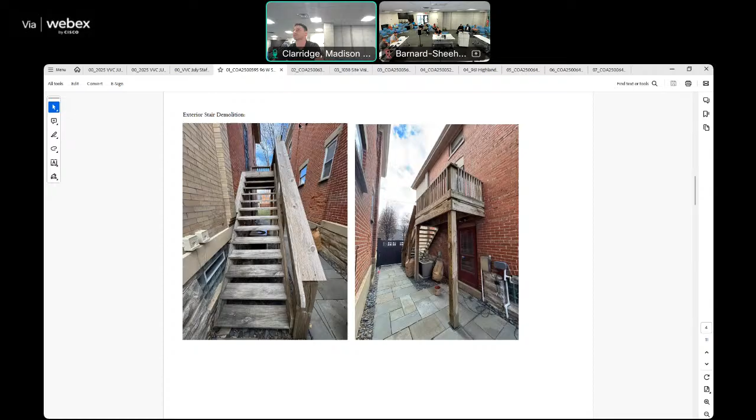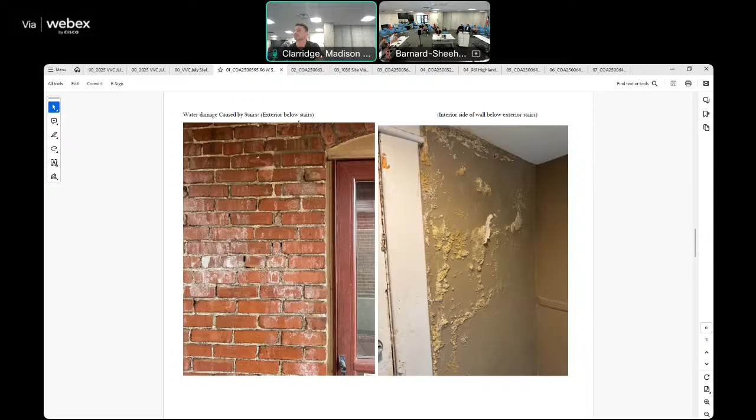Anything you want to add about the proposed work? Just that the stairs are non-contributing to the home. The home was originally a single family, converted to a multifamily, and I believe in the early 2010s converted back to a single family. So this is one of the remaining pieces that would help complete the single family transition. Also, the stairs channel water towards the home, causing damage to the interior and exterior, which is necessitating the removal.

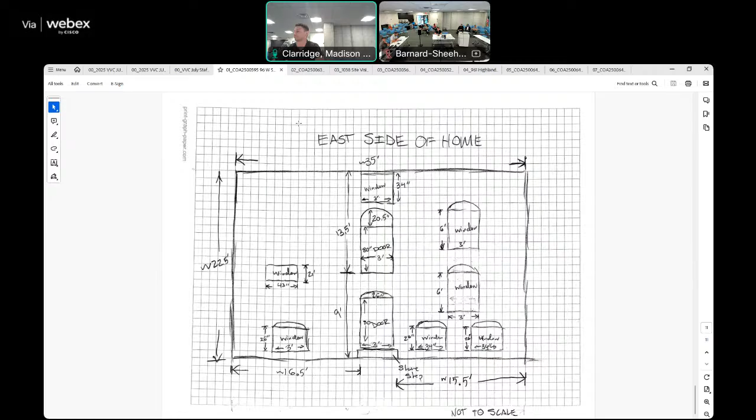Thoughts? Anything? That clarification, I think, helped on the door from a safety perspective.

Is there a motion? Motion for Certificate of Appropriateness 25-00-595, 96 West Starr, as for approval as submitted. Second. All those in favor say aye. Aye. Any opposed? Motion carries.

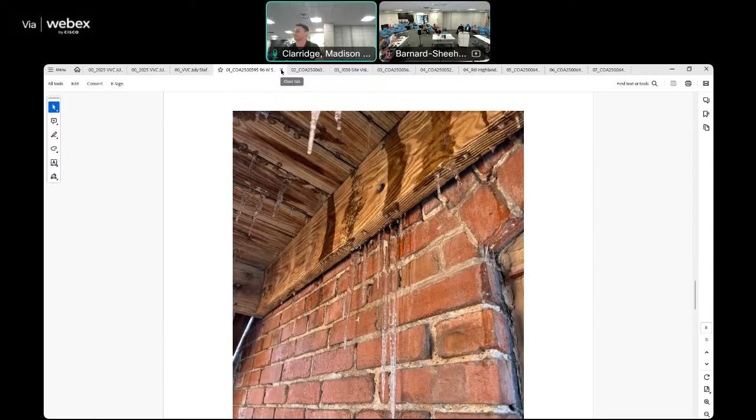All right, we're going to move on to application number two. This application is for 362 Wilbur Avenue. Go ahead and I'll finish reading the staff report. I'm hard of hearing.

This is to replace retaining bricks around flower beds and replace the existing retaining wall. Commissioners at the business meeting requested a site plan and construction details of the wall. They wanted to know if there was drainage behind the stone, and the applicant clarified that there's just dirt behind the wall.

More information on the material was requested, such as the cover product sheet or information from the store it was purchased at. The commissioners were curious if additional landscaping work would occur, such as planting of flowers, bushes, or trees. HPO staff will be inquiring with the Department of Public Service if the sign currently located there can be relocated. I have inquired, I have not heard anything. I will be following up with somebody different as well.

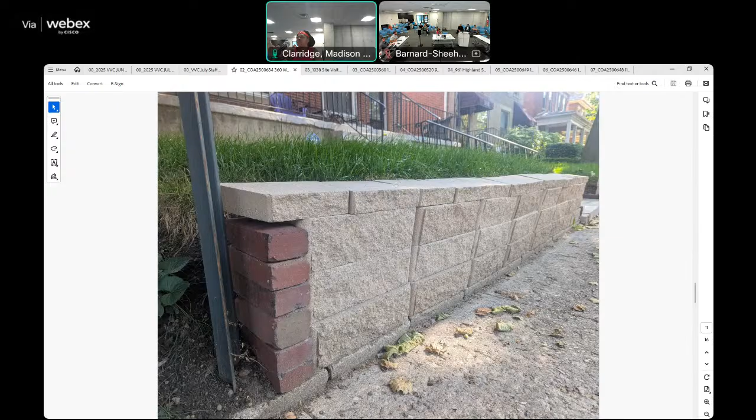The question was whether there might be a drain behind the wall. It's not, it's on the side and it comes down, out into the street. In front of my house, I make sure all the leaves and stuff run to the corner where the drain is. One on the right side is connected to PVC. The other one comes down but it's right on the outside and just runs down. And those little rocks, the neighbor and I made a little trough and put some rocks so it can not overflow and come straight down into the street. So that's what those rocks are for, just to guide the water.

Turn it over to commission comments about that. I didn't hear what else. At first it was about the wall, and she was concerned about the sign. For me, it's okay that it was there because it's for my use. As I stated last time, I believe the reason they put it there wasn't for the whole parking place, just for one parking place. So that's what I believe they did.

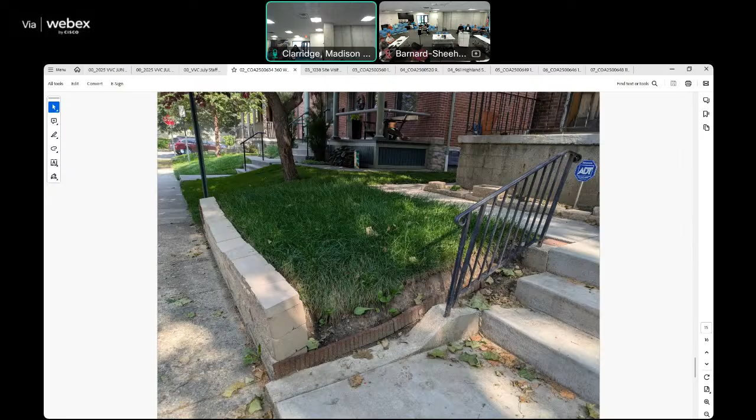Yes sir. Okay, so we have heights, we have material, we have install. Is there anything else, team, that we're missing? I think we talked about appropriateness of material. I think the type of block we have here with that finish is appropriate. Once we get the staggering of it, I think it's appropriate.

And I think obviously you said it was a gift, right? You're my son. For sure, and I think what we're trying to do is maintain the integrity of the gift. So we just don't want to see it walk away, all of a sudden everything's gonna fall, but we're trying to help you prevent that. I appreciate it. Okay, is there anything else, team, that we're missing?

So I think our next step, what we would do is we would vote to continue the application, if you're willing to make those modifications and work with HPO staff to provide a detail, work on the application, go back and look at some of the things we suggested. And then you would come back and we would vote on that new material to be able to clear the application.

Yes ma'am, and then you would be able to move forward with whatever install product data, whatever you're willing to do as part of your application, then we would vote to move that forward, and we'll go ahead and do it at that time.

Could I maybe play devil's advocate for a second? Yes sir. Would it be, you know, to reduce the number of meetings - I agree, the applicant might not want to come back necessarily - should we vote on an approval with those conditions? Changing the bonds, changing the...

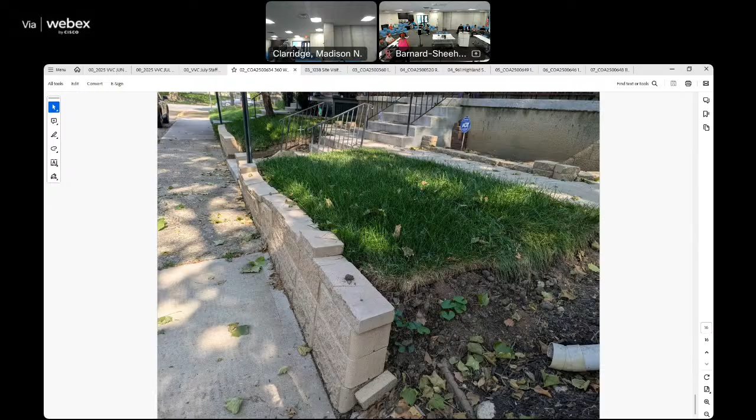And if they're willing to just draw anything out to show what they're doing, just like I think on the back of your paper there, Sean. Okay, just something very, very simple. Hold something that's like, hey, this is what we're doing, and there's a little photograph, and they can draw on the photograph. However it's easiest for them to present it to us, but we just have to have that documentation in place. Does that help? Yes, it does.

And I understand what you're saying, because I was just gonna do it, and then tell you what you're saying, you want it before, so the clarification, great question, great question, yes. All right, so go ahead and sit down, and we'll go ahead and vote accordingly, and then that way we can chat. Do I sit here? Yeah, no, go ahead, back to where you were seated, right there.

Okay, so a motion team. Yeah, I think maybe in the amendment, in the motion, we're just gonna spell out what that is that we talked about, just so it's clear. Very slowly, yes, because I'll get it right. Okay, no worries. So I can take a stab at it. Yeah, sure, I appreciate it. Thank you.

So I would make a motion on COA 2500-634 for 360 to 362 Wilbur Avenue to approve the application with the following conditions: that one course of block be removed from the wall to lower its height, that the block be installed in a running bond pattern as opposed to a stack bond as submitted, and to provide further design for drainage on the retaining wall, and to provide returns at the stair and at the end of the wall as feasible, given site constraints.

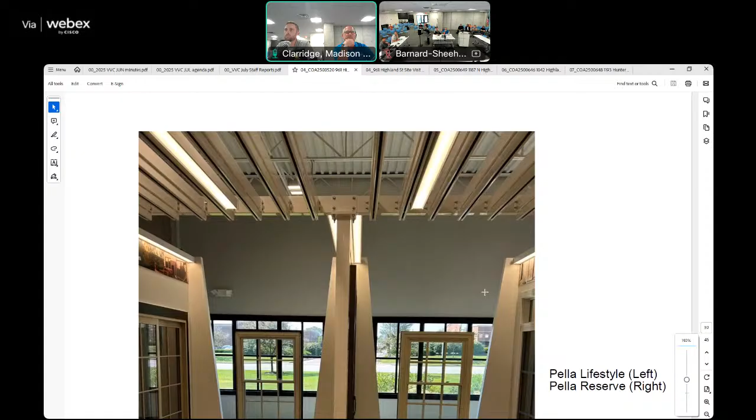It is, it's right there. So those are the two completely side by side with each other, Lifestyle and Reserve right next to one another. Obviously, the one on the right has applied brick mold on it, whereas the one on the left has zero exterior trim, it has applied brick mold but a smaller profile.

These show grids. We're not proposing grids, so that's what makes those look a little different. I think what's challenging is there was a lot of work that staff did to make the list, and there's some cut sheets that took a lot of time to try to help us.

Every application being able to make that comparison is really challenging for us. I think even with the information that's been provided, that's what's challenging for us too, right? So the thing that we continue to uphold is the most current, approved list.

So I think today we did get clarification that the architectural series needed to be the reserve series. I'd advise, even outside of this application, your team being able to sync up with the HPO staff to get that clarified, because that's going to help you guys in the future too.

Is there somebody we can contact to do that with? Okay, so I think that's just from an application perspective. I don't know, as far as the information that's available today, to be able to make a call that the merits of that proposed lifestyle meets all the things that went into the approval process of identifying what windows and what manufacturers should be on that approved list.

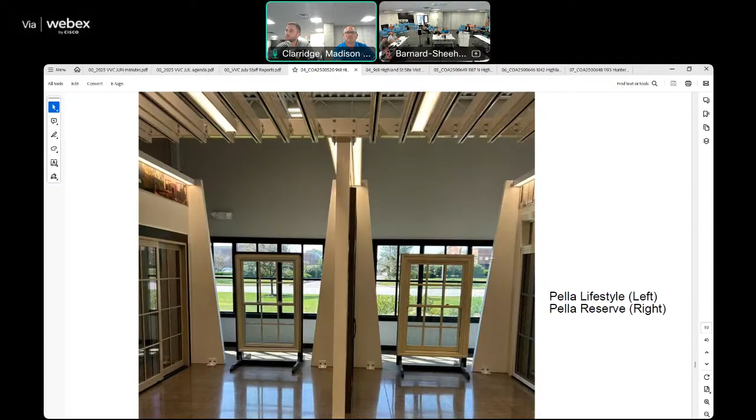Yeah, they're definitely different. And I understand, I think it's really tough for us, because the thing we all understand is what does that look like. Trying to keep the sash as thin as possible, trying to keep daylight, the unit as large as possible. All of those things lead into the aesthetic of it, but for us, I don't know if we could identify that today, to be able to say that is an acceptable alternate from that perspective.

So I think the only thing that we can do is really kind of swing back to the approved list. Purchase costs and things like that are kind of outside of our purview. So the only thing we can really try to point to is the approved windows list, with the information that's being provided today.

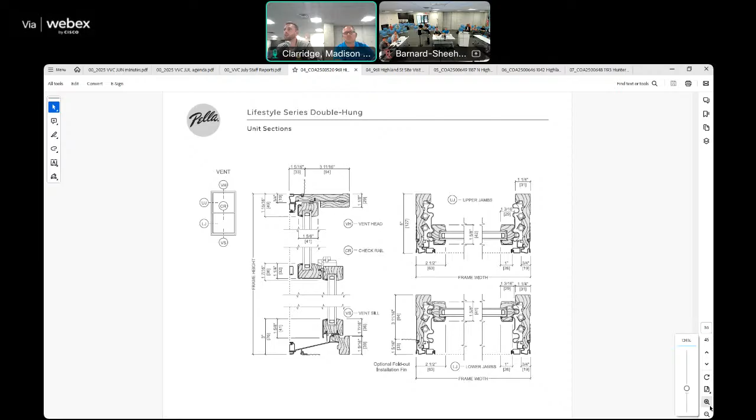If I do have one follow-up question to that - so when we had met the last time, that's actually exactly what I was going to point at. When we had met the last time, I was asked to provide additional information about the window, a cut section, and also the corner sample I brought here. So what additional information would you need from me?

Yeah, I might want to be just looking at the frames. Seems to be a lot of fluting. Cladding that's outboard of the window, glazing. You can see a rounded profile here, and it's kind of the same as the sample. It might be better to show that, since it includes that specific style.

So this is the lifestyle unit right here, and that cut is the cut section of the same unit - that's the outside, this is the inside. I'm noticing that the feature about this window is a very striated jamb, and I'm not certain whether the reserve window would have that same feature.

Are you talking about the frame, the exterior frame, this portion here? Correct. The frames are identical between the reserve and the lifestyle - the only difference is the jamb part right here. Yeah, the interior jamb here is different on the reserve product. To me, that is a visual quality that might make lifestyle windows something I would hesitate about saying is appropriate, if it's going to vary significantly from the window that's on the approved list.

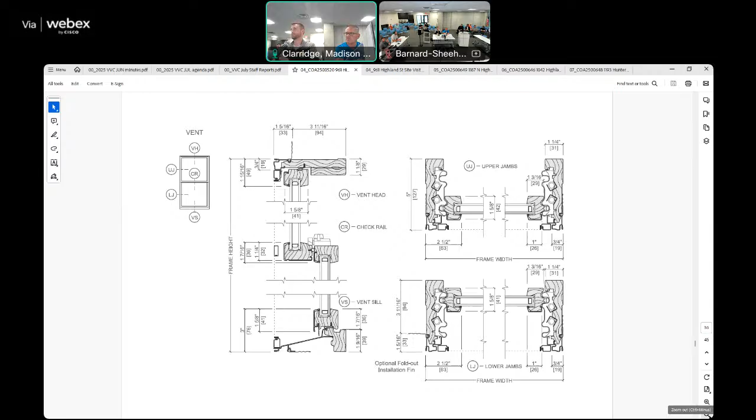It's an interesting anecdote. It's something that we- perspective. Yeah, it's interesting.

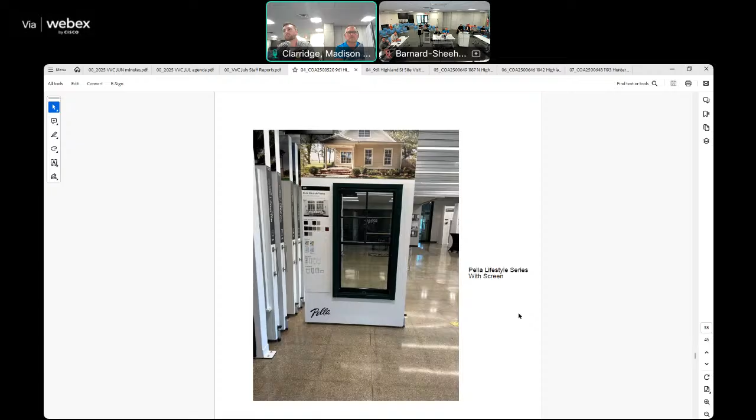Or I guess we have approved it in some cases, or put it in the test cases, but we're willing to follow you guys down those steps, but it is gonna take going into detail - more than we can do today - in terms of the mitering of the corners and how the cladding is done, all of the stuff that none of us here are individually equipped to find out on, and in relation to the other committees, because it's not just our list in terms of the commissions. So, I understand there's a price point difference, but time is money as well. We're happy to go down either road with you guys, but just want you to know that's kind of where those two paths take us.

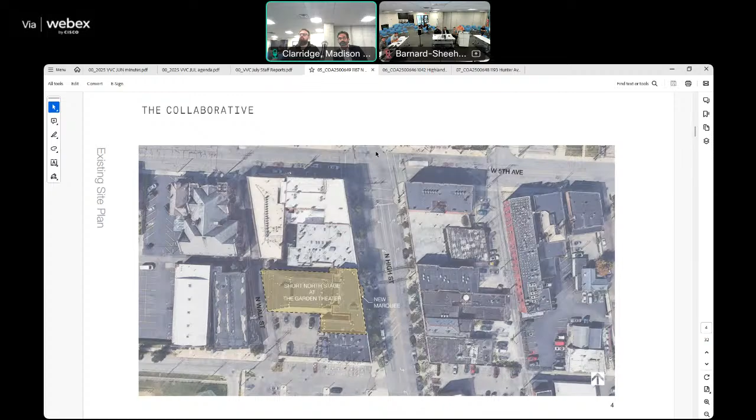Can you guys state your name? Tom Mahoney. Mark Suplak. Logan Dutz. Do you swear to tell the truth, the whole truth, and nothing but the truth? Yes. Yes.

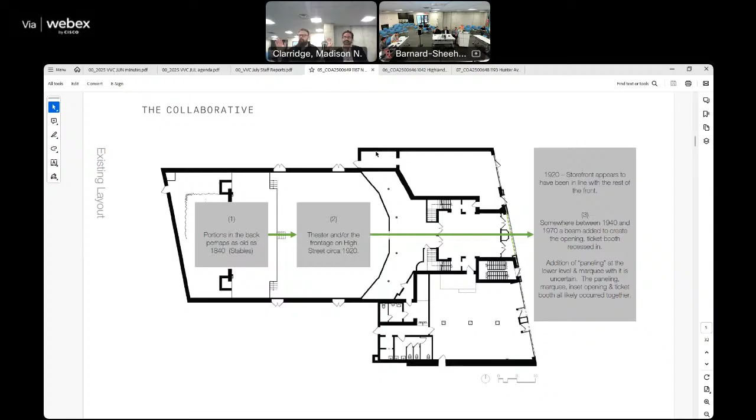We can belabor this or go through it quickly. This project's been around for a while. Sean, it sounded like you've been on the commission for a while, maybe you've seen it. The rest of you perhaps not. I'll say the same is true on our side, we're new to the mix as well. So there's history on the project, history on the building, but we just want to level set on that. We're new to the mix, and we're honoring a lot of the good work that came before us, be it the alignment relative to the commission and the designers who came before us.

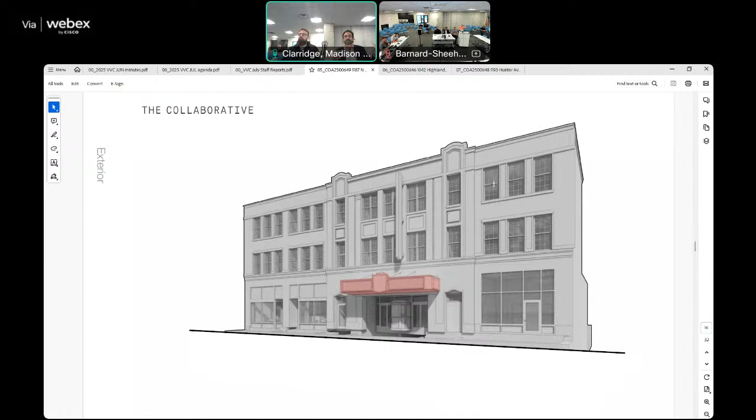Ultimately, what you have in your packet, the DaNite package in particular, is the previously approved package that occurred, I think, prior to the pandemic. Obviously the pandemic stymied just about everything, inclusive of the business. It sat dormant, all good intentions by everybody involved, while the Short North Stage, which is a nonprofit, got their arms wrapped around certain things, capital campaign in particular. So some of that is gaining a little traction now.

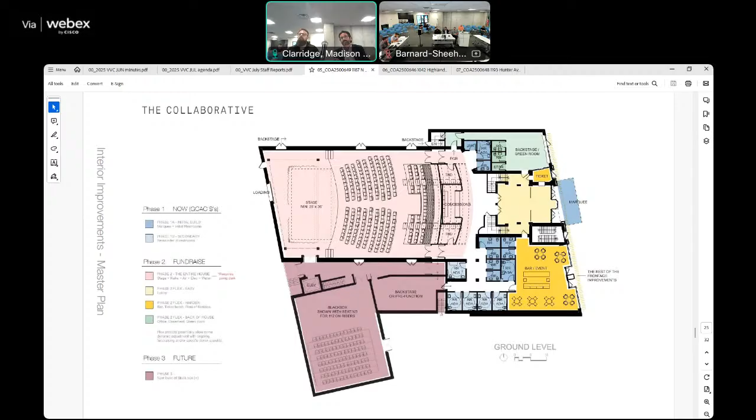There is a grant in the mix, so we're back with all of that. We're trying to honor all the work and alignment that's come before us. We collectively recognized that since the shelf life of our previous COA didn't persist, and if we have to come back, there's a bit of a shortcoming and a grand opportunity to do something better. We think it's more in line with precedent, be it the original marquee, the Short North, or marquees around town of a comparable era, like the Ohio Theater, the Lincoln, the Drexel out in Bexley. The list carries on.

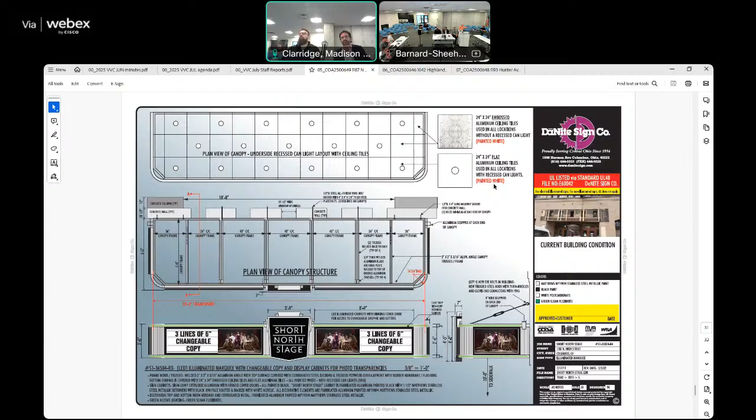So we took that opportunity. We're open to discussion on it. There's still work to do if we're reasonably amenable to some of those things, but that's kind of the submission here.

Relative to all that, you have a sense for what's in the package, aside from the options for the underbelly adjustments. Our ideal outcome here today is some measure of a vote, albeit with potential conditions. The Short North stage and the capital campaign is getting traction, and it would be a lovely amenity for all of us. Part of that traction is fast tracking the marquee into place and staying the course. So ideally, that's where we hope we're angling.

Thank you, Kimberly, for the guidance specifically on the open bulb. The Tivoli lights, open bulb—you see a little of that on the original on the right side there. We also have adjustments we think we could make which could still recess the entire central plane, not to the perimeter like you're staring at now, but recess the entirety of the central plane up some, so it still has the effect of the underbelly of a marquee like we know at the Ohio Theater. There are adjustments we could make to get to what we hope would be a really agreeable state, whereby we both get an improved underbelly and, by the way, make sure we're shielding it effectively. If we articulated anything to land it as a sort of aha—the arches, of course, have Tivoli exposed light bulbs on all of them, the entire stretch of the road. So there's a bit of how do we do it appropriately in agreeable ways.

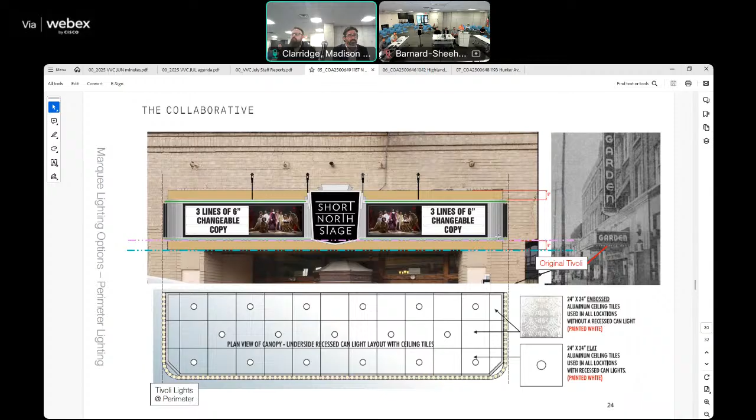What you're looking at is the original underbelly plus the edge Tivoli lights, and that original design was approved. You see a blend of the pressed, stamped aluminum, decorative stamped aluminum, and white inlays, so there's a bit of a checkerboard pattern. It'll be a solid surface, whatever it is, and if the Tivoli lights are dancing we'll take that layer out, so it'll be a lot cleaner and have an appropriate rhythm that works with the structure.

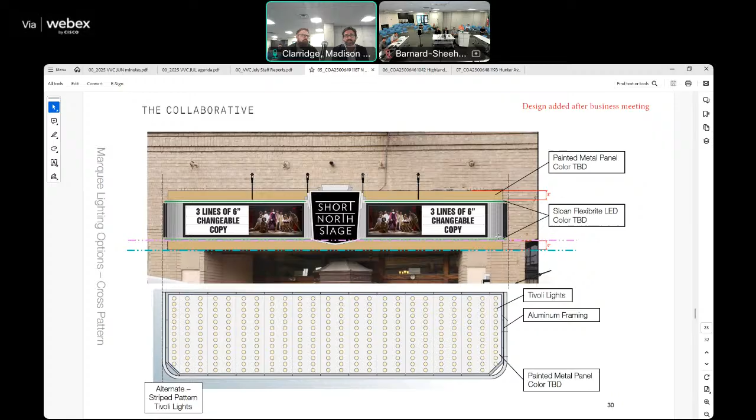I think there's a section of this at some point in the drawings that might show this earlier. Thank you, Commissioner Skinner. I thought there was one — yeah, here, there's the DaNite package of drawings in there. Keep going a little bit more.

So what you see here, if we follow the yellow pointed arrow saying 10 foot to the grade, that ends at the ceiling. You're looking at the original design, but that ceiling is basically a tray-in metal, and you see the recessed cans, so there's some space up to the structure. We have some options to work with that can make that function, and the Tivoli lights will potentially be on the bottom side of it, with the aluminum piece painted.

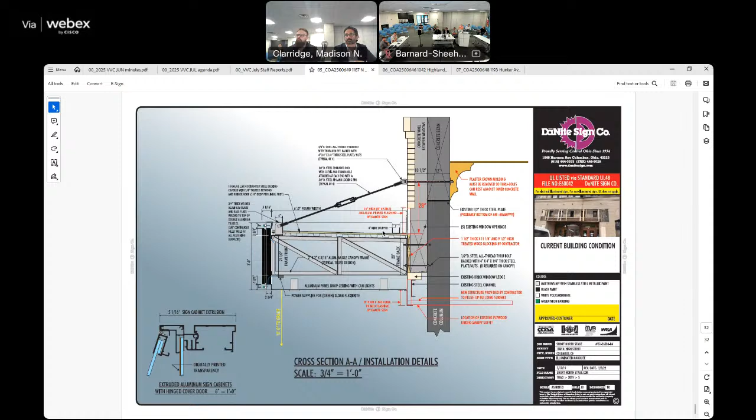Provide that information, balance that out. I think as long as it's with the photo, that's what that is. So what's today is, the only thing we can do is, I'm assuming commissioners want to see updated materials and kind of help expand that a little bit. That's okay with me, as long as that's okay with our applicants.

There's a condition specifically about a warm color temperature, and there's a submission of color material of the bottom face. I caught those three things, and I'm asking because it'd be our preference, could we vote with those conditions? We need to, I know this is a chicken and egg thing about whether you get a new package from DaNite, but we're gonna need the new section drawing for a final approval anyway. It's just a matter of how it gets there.

So whether it's a subcommittee or whether it's staff or whether it's us, we can be open. We've got to get to that final. Let me ask it differently. So the only change here is essentially the bottom. Is it possible to basically say the bottom comes back? You see where I'm going? Could we approve the rest of it in order to start, if we're satisfied with the rest of it and the rest of the package, which is a completed package, and then parse off the bottom to say the bottom has to come back for.

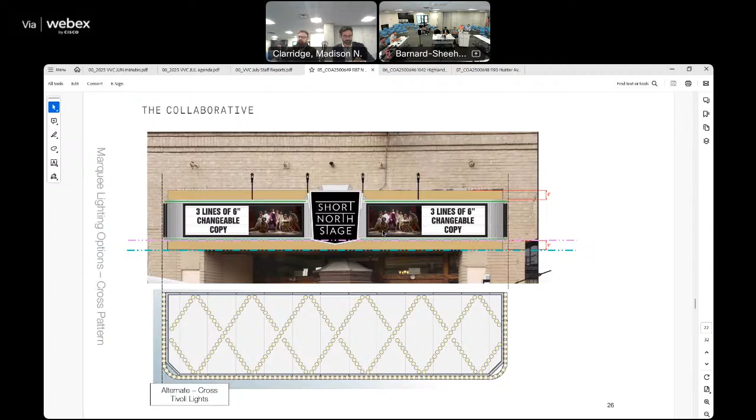I would move to continue COA 2500-649 for 11/8. Second. All those in favor say aye. Aye. Any opposed? Thanks, likewise. Thank you.

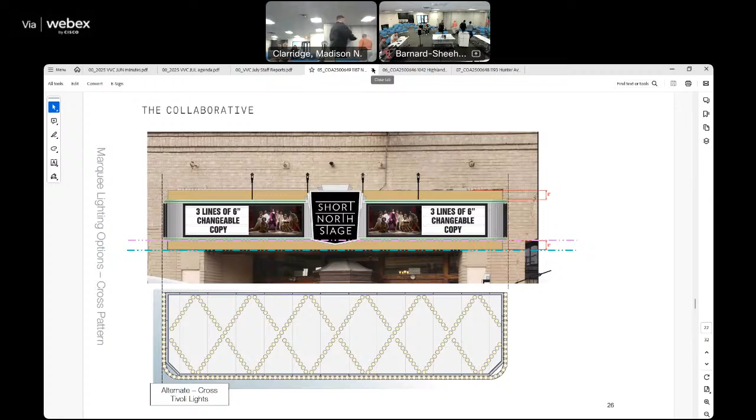Application number 6 is 1042 Highland Street. This application is to construct a 22 foot 8 inch by 24 foot 8 inch garage, with 2 options proposed.

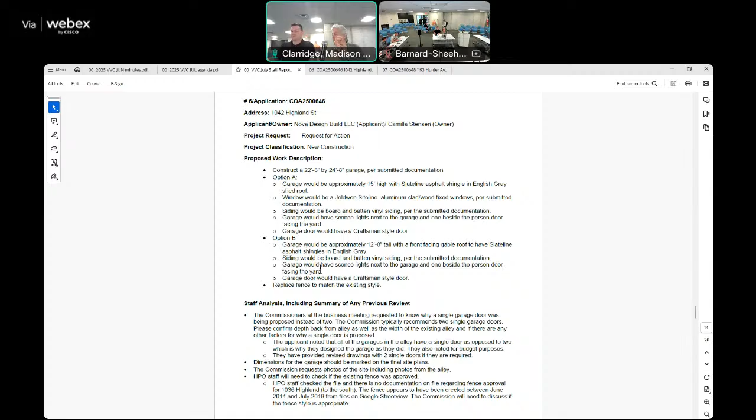Option A: the garage would be approximately 15 feet high, with Slateline asphalt shingles in English Gray, and a shed roof. Windows would be Jeldwen Siteline aluminum clad/wood fixed windows. Siding would be board and batten vinyl. The garage would have sconce lighting next to the garage and one beside the person door.

The garage door would have a craftsman style door. For option B, the garage would be approximately 12 feet 8 inches tall, with a front facing gable roof using the same shingles and siding proposed. It would also have the same sconce lighting next to the garage doors and beside the person door, matching the house style while shifting the front design.

The commissioners at the business meeting requested to know why a single garage door would be proposed instead of two, as the commission typically recommends two single garage doors. Please confirm the depth back from the alley as well as the width of the existing alley, and if there are any other factors for why a single door is proposed.

The applicant noted that all the garages in the alley have a single door as opposed to two, which is why they designed the garages that way. They also noted it was for budget purposes, and they provided revised drawings with two single garage doors if they're required. That should be in the packet.

Dimensions for the garage should be marked on the final site plans. The commission requests photos of the site, including photos from the alley, which have been provided. Staff will need to check if the existing fence was approved, which I did. I checked the file, and there's no documentation regarding fence approval from 1036 Highland to the south. The fence appears to have been erected between June 2014 and July 2019 based on Google Street View photos, and the commission will need to discuss if that fence style is appropriate.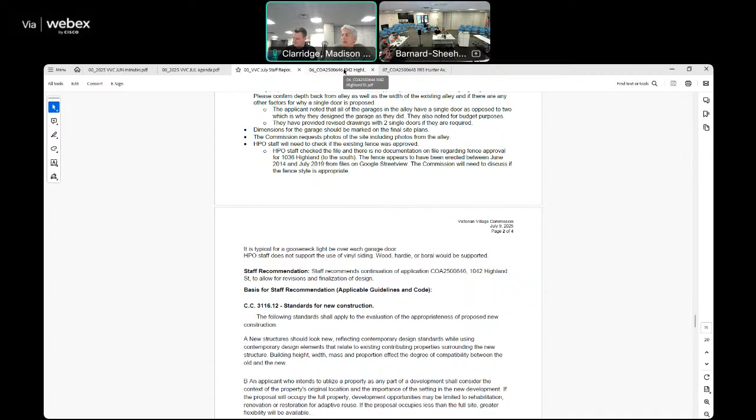It is typical for gooseneck lights to be over each of the garage doors. HPO staff does not support the use of vinyl siding; wood, Hardie, or Boral would be supported. Staff recommends continuation of the application to allow for revisions and finalization of design. The basis for staff recommendation is City Code 3116.12, the standards for new construction, as well as the Victorian Village guidelines on construction.

Can you state your name? Dmitry Novak? Tanya Axel? Yes.

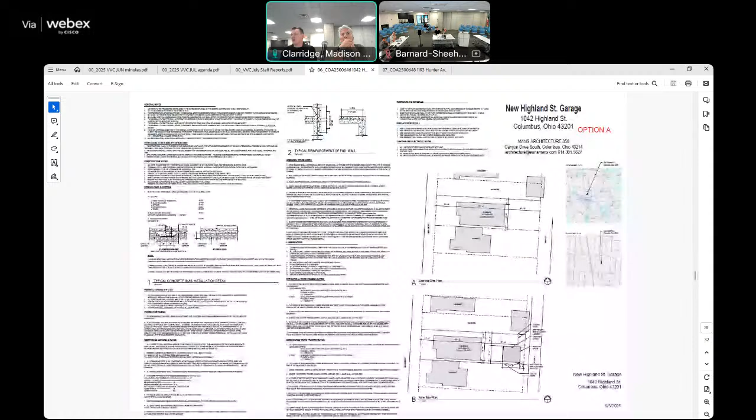So we submitted two options. The first option would be, I don't know if you saw the plans, more of a sloped roof at 15 feet at the peak, which I think is what you guys require at the max height. And right there, this is with a window over the garage door.

We wanted to do a single garage door for a few reasons, one being, as Tanya just mentioned to me, getting into and out of the garage. With two single garage doors, it would make it much more difficult driving in and out.

It looks ugly, I'm sorry. It really does look ugly. And I look at it and I haven't seen anybody has the double doors. We really would like to have a single door there if it's possible.

The exterior material, I guess the reason being we're trying to stick to a budget, vinyl is our best option. Looking from the road, you can't really tell driving by if that's Boral or Hardie, unless you're an expert. But going off the street, driving down the alley, there's not much of a difference. But I guess it's what you guys decide.

Let's talk a little bit about the materials. We've heard about the difference between A and B. Do you want us to give feedback on both A and B, or just on A? Yeah, feedback on A. Just trying to figure out, there's some revisions that are probably going to take shape, so we want to make sure we're giving you the right feedback to help with that.

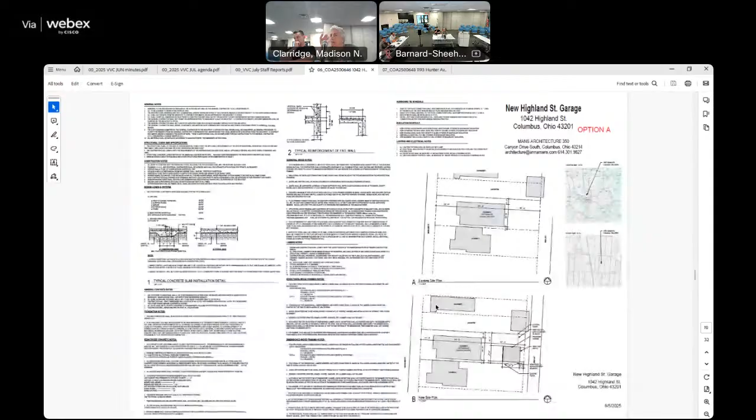I think your other option is more appropriate. The other option is similar, the same kind of garage you see everywhere. We're talking about garages built 20, 30, 40 years ago. This house is 1870, and a little bit of imperfection makes it perfect sometimes - and that looks gorgeous. That's your typical garage.

What could happen - something complementary to the existing home with a little bit of difference from a traditional garage could be a way to marry the two together. Can we show an example of a hip roof? Can you pull up an alley, find a garage with a hip roof? Are we looking for one with a porch? Yeah, hopefully. The reason I'm suggesting that is only because the existing home has a...

While you're looking for that, in the alley there is currently a new garage being constructed that's going to look similar to hers, and it has the board and batten, but I don't know if it's vinyl or not.

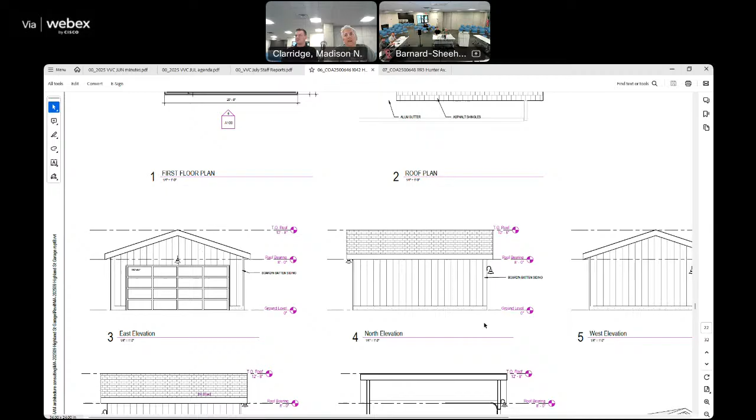Talk a little bit about the... this, I think so. Please just try to make me feel good. One door.

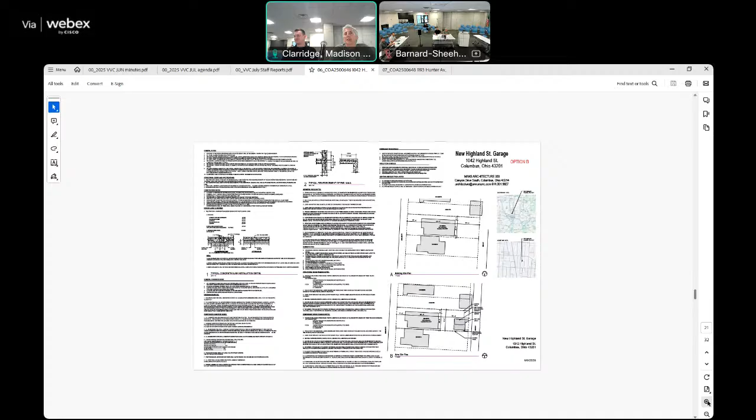One door, two doors. Every alley, every garage. Right, yeah. We got it. Well, yeah, I'm happy, thank you about that.

Look at some more, there's a cut product sheet of the project towards the end. But in terms of whether that would be appropriate... this would be on the back of the garage. But I don't want to jump around on things.

As far as the person door goes, these doors don't fit within the guidelines. These are more craftsman style. Frankly, it'd almost be better if you flipped this up 180 degrees, and we would probably say it's fine. But this is just kind of the wrong format. Fortunately, the guidelines have a lot of clear direction with doors. That's fine, the wood kind.

Are we okay doing a double door? So she wants a double door. Yeah, we could do a double door. Like a barn door look, yeah, might be better off.

Without barn doors, a lot of houses in the alley have the diagonals. That's right, yeah. Hard to get, and it's cheaper. You could do it at home.

Well, fair enough, yeah, but either have it just follow the guidelines or suggest something. We're not gonna recreate it, because our neighbor across from us has the barn door, and they went through the same thing we're going through here. So, similar to theirs could be perfect.

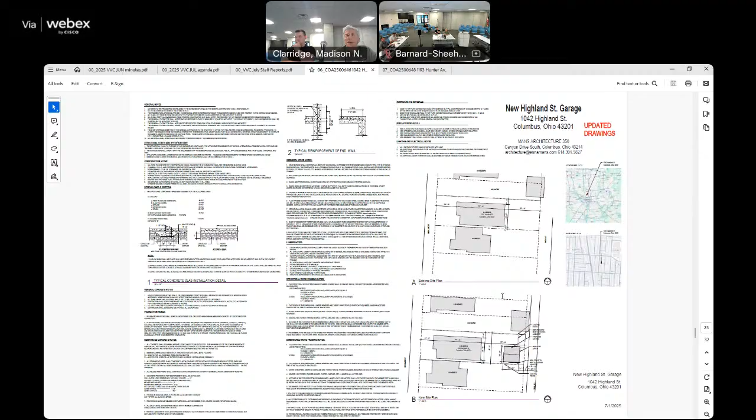No, great, they didn't have a garage door submitted. Yeah, you did, okay. It was, let's see, it's from Deluxe Doors. There wasn't a cut sheet in it. Can you recheck that again? Double check, because I'm starting, and when I PDF everything, stuff gets left out.

I'm going to blame the PDF. And you can use that for five more years. I thought it was pretty primitive. Because they did update some of our programs.

But the lighting fixture, I think it's the picture, the fixture, yeah, difference, right? But this is the door detail. You can't really tell on the door itself right now, but maybe you could have a good idea of what we're gonna be using.

Black, so nothing. Coach lights for the movement. Well, the fixture is the same thing as what we have at the house. Around the house, same kind of fixture, and that's the reason we chose them.

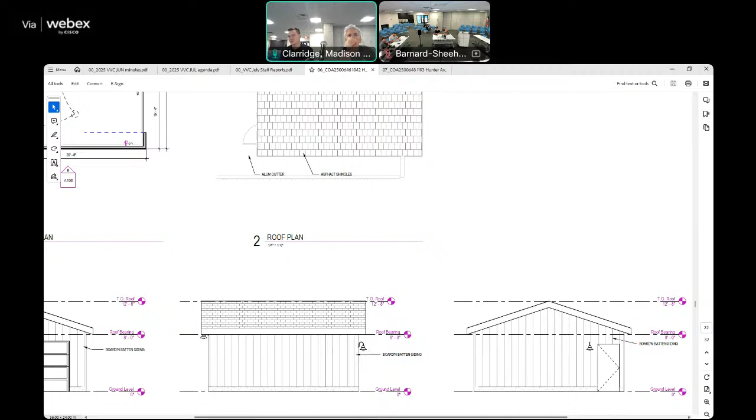Lighting, we talked about which option. Anything else that might be missing?

Shingles were only approved, shingles wasn't perfect. We approved it, shingles plus. Same shingles that we used for the house, which you guys approved to be done a month ago, so we're using the same shingles, yeah.

With the new style, we're not gonna do a window at this point. There won't be any window, because you guys killed it. There was a window on top of it. Okay, no windows.

Yeah, 100%, yeah. We haven't talked about the fence. What are we gonna do with the fence? Can we go ahead and build it, or?

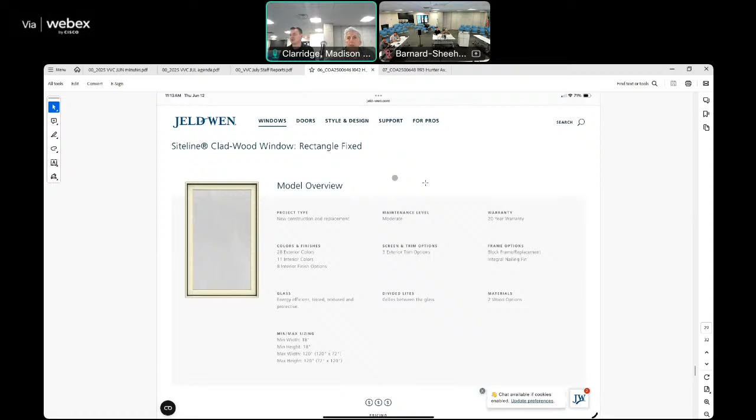Right there, that's the fence that we are currently... that's your fence. No, that's our neighbor's fence. We're just gonna make sure it matches theirs.

Tell me a little bit more about it. It's like the dog ears and then the no shadow lines. Well, I don't know if the guidelines specifically say about it. Different villages are more prescriptive - you cannot have a dog ear here.

And the shadow boxes, it's all out. Yeah, we don't allow staff-level shadow box fence. It would have to be... what is a shadow box? We typically encourage the board.

That's not to say the commission hasn't included some taller metal fences. And then the guidelines do say, I think, like a metal fence in the front yard or a picket, but I don't think the back privacy fences have as much. So we've been working on standards for site improvements, which would be kind of the precedent of the area. The only problem with this is it was not approved.

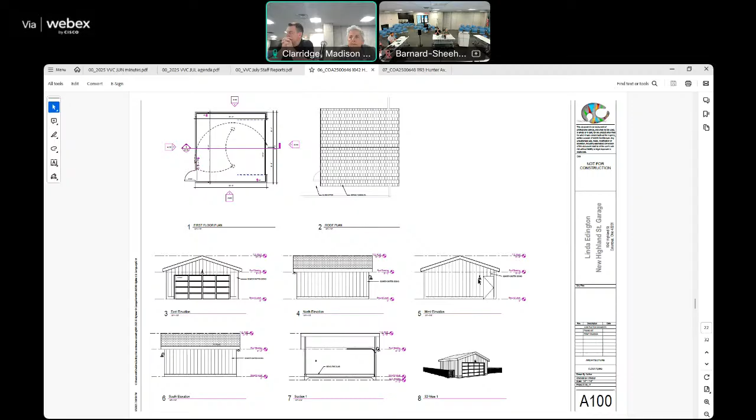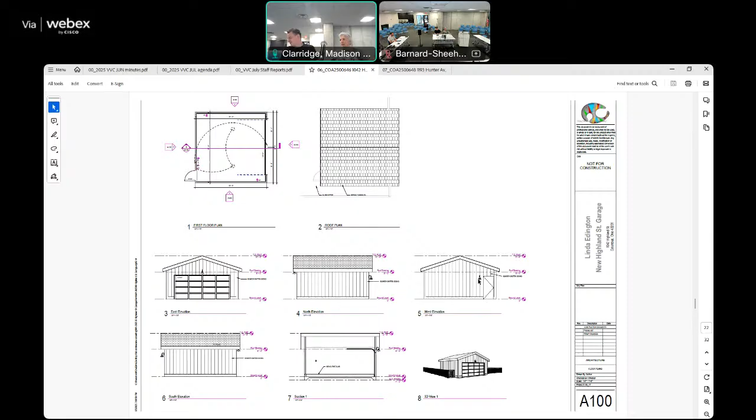That'd be awesome, can do that administratively. Okay, so it may save you a couple of weeks on the garage, but no guarantee. Does that help? Does that seem like the right process to go? Yeah, so if I understood you correctly, let's say everything goes great, we would have an answer within 2 weeks. So you'd have to submit within a week. Yeah, we'll submit it, okay.

And then we'll have our next business, our next hearing. Which is happening this month or? July, Wednesday of the month. So July 30th, at which point, if we have enough of the commissioners that show up to the business meeting, which we usually do.

I know, right, in the middle of no vacations on those days. Exactly, this is the problem.

Then at that point, we could say we're good with it and move it to staff approval, which means Kimberly could then approve it for you and keep that piece moving forward. Whether or not the fence piece, we will break the fence apart. We may split them up so that you don't have to come back next year for the garage and wait for that whole thing, or wait another two weeks for that.

Is there a motion to continue? Motion to continue application COA2500646, 1042 Highland Street.

Second. All those in favor say aye. Aye. Any opposed? Thank you so much, thank you very much.

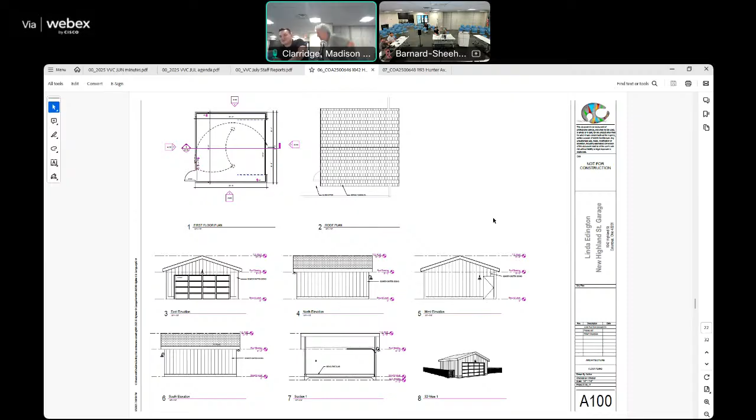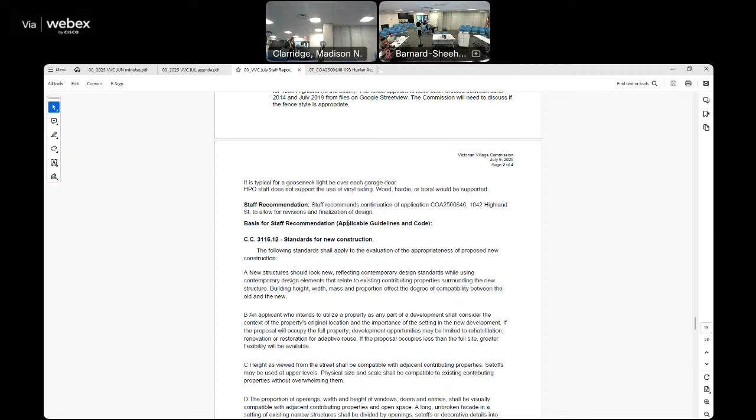Well, we have one right. Thank you for coming. That would have been very complicated. It would have been very difficult for me to explain this to you.

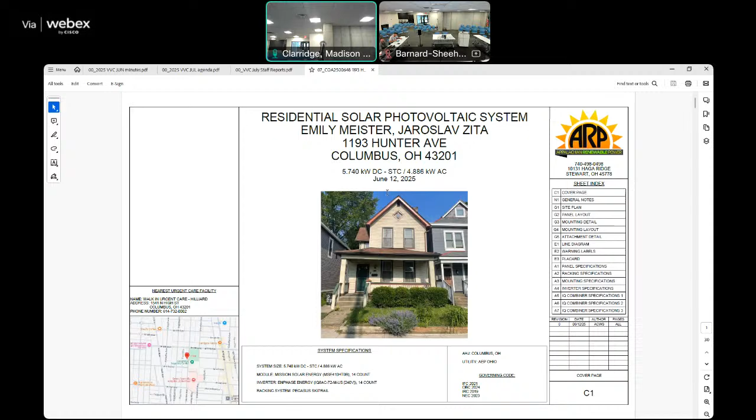This application is to install 10 solar panels on the garage and 4 on the house, with electric to connect the existing utility meter. Commissioners at the business meeting requested more photos of the existing conditions, specifically the house. We need to see the angles of the house because they believe solar panels will be visible from different angles. Photos should include a photo from the south of the house looking back towards the property and the garage. The commission wanted to know if the conduits and associated materials would be routed on the exterior or through the interior of the structures.

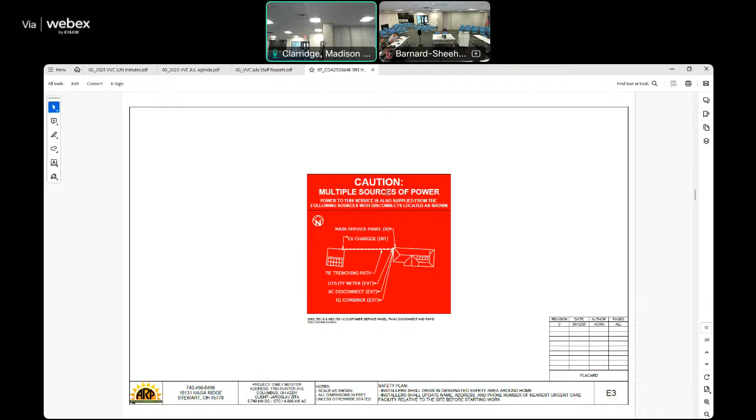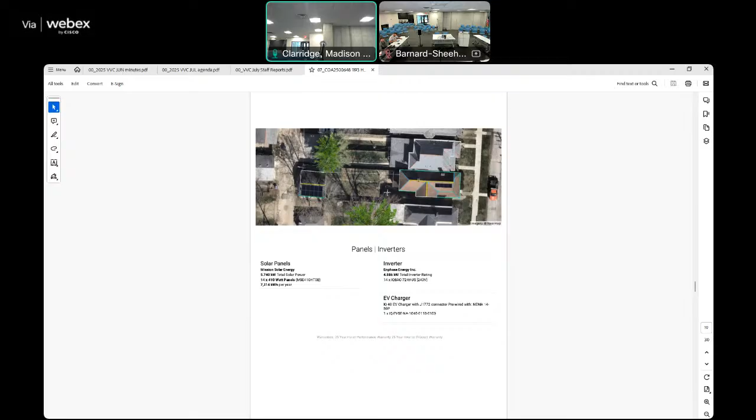The commission has previously requested the panels be flush with the roof, the combiner box is either within the garage and/or in the building, and not disturb roots of trees or plantings in the yard. HPO staff considers the roofs of structures contributing architectural features, and any solar panels placed on them should be minimally visible. Panels on the house would not be supported with their proposed placement, as that would easily be seen from the right of way. The panels behind the cross gable or on the rear addition would be more appropriate. The front porch and rear addition roofs were replaced in 2008. The roof of the main house was replaced without approval in 2003.

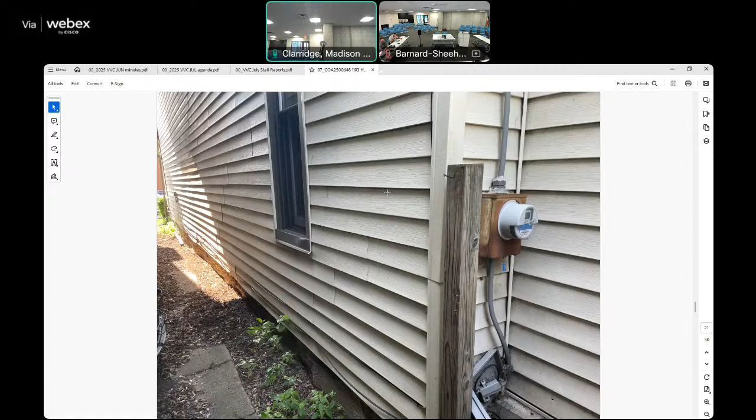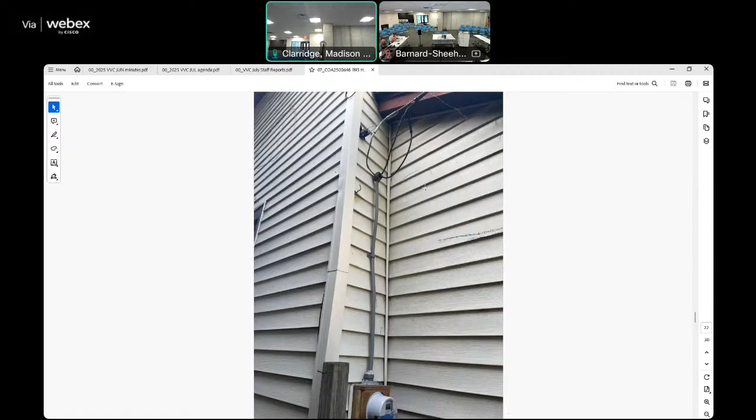Does the condition of the existing roof need to be taken into consideration? Just a question for the commission to discuss. Staff recommends continuation of the application to allow revisions of the design to better follow code and guidelines. Basis for staff recommendation is City Code 3116.11 standards for alteration, as well as the Victorian Village guidelines on roofs, and the National Park Service guidance on solar panels on historic property. In lieu of an applicant being present, I would recommend continuing.

I mean, clearly, if we want to provide some preliminary comments, we could. I don't think I received additional information, so I think the comments from the business meeting still stand. I think they do too, same thing. Yeah, really consistent with what we were thinking we would do.

So is there a motion? I'll do that. I move to close the motion to continue COA 25-00648, 1193 Hunter Avenue, per what staff said. Is there a second? Second. All those in favor say aye. Aye. Any opposed?

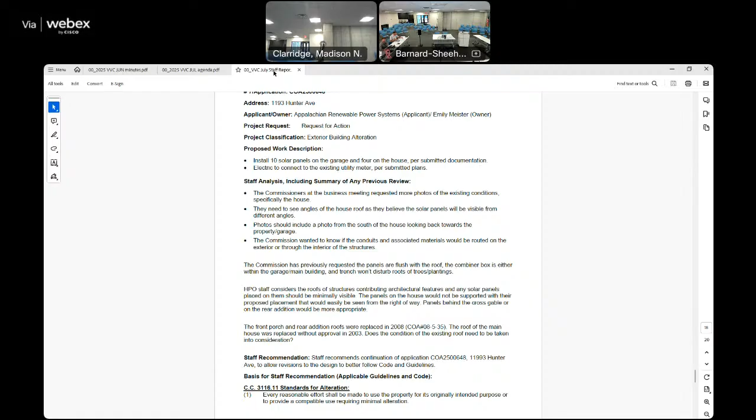All right, and then we have one item of business, which is the common staff approval check-in. The staff person in our office did the staff approval list, and I don't recall if they presented or the management did, but regardless, we wanted to check in and see how that was going, and hear comments, complaints, additional suggestions, and make sure it's working well.

Meaning what staff is approving? Yes, which I'm sure everybody is diligently looking through. I look it over, for sure. Everything seems appropriate, for sure. I've never looked it over and said, oh, we should be looking at that. No, I think you guys are really good about keeping things, even things that could be questionable, bringing it forward. That is the problem, I agree that you tend to err conservatively there. If there's something that comes forward, we can pass it on.

For sure, yep, that's vice versa, right? We're here to help you too as well. So if you feel like there's something that you need us for, don't hesitate to reach out. So don't be concerned at all.

Is there anything you think could be added? I'm not saying it would be, I'm just saying we want to provide some additional feedback, like maybe we should consider this or keep it on our radar over the next year.